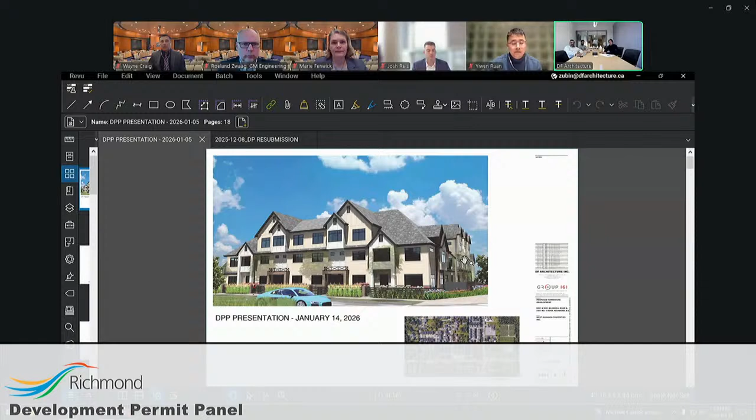So everyone can see the screen? Yes, you can go ahead and maximize. We'll go on to the context. The next sheet, please.

This is a site which is located at the intersection of Number 4 Road and Blundell Road. We have townhomes on the west and north of the property. On the east side, across the street, we have a daycare facility and a two-story single family home. Similarly, on the south side, we have two-story single family homes. The access to the property is through the existing drive aisles of the townhomes from the north, and to the west through the shared access agreement. The project consists of 14 townhome units, spread across 3 buildings, with building 1 the westernmost northwest building, building 2 facing Number 4 Road, and building 3 facing Blundell Road. We can go to the second sheet.

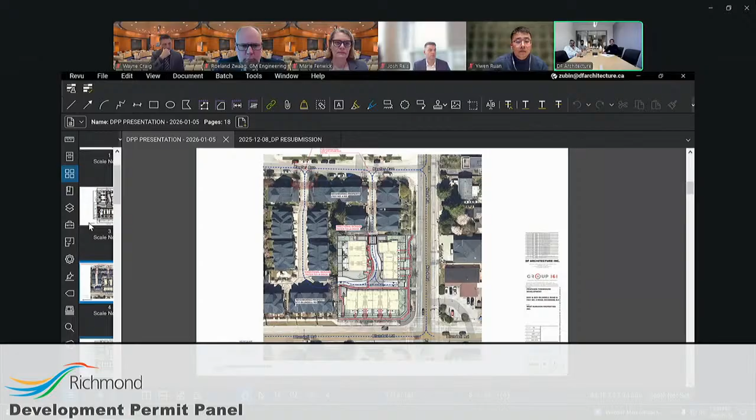In terms of pedestrian access, the main pedestrian access is through Number 4 Road with an accessible 1.5 meter pathway, which leads across the property and also to the outdoor amenity area. We also have a secondary pedestrian access from Blundell Road, which connects the pedestrian crossing to the east side as well. All the units facing Blundell Road and Number 4 Road have street level direct access with patios, thus activating the street presence and the architecture and landscape surrounding it. The convertible units, which are the larger units, are planned on the corners of the building, rather than side by side, which also adds to the elevation and massing of the overall building.

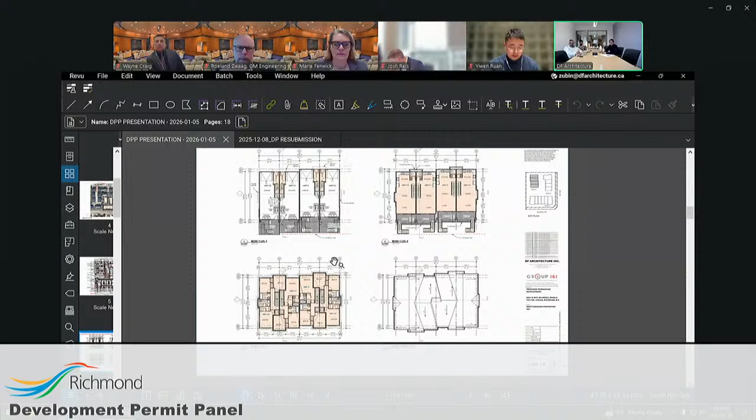The main unit typology is 3-bedroom, comprised of either 2-car garages or tandem configuration. Since building 1 faces an existing 3-story townhome development, it's mostly tandem with 3-story configuration, ranging between around 1,800 to 1,900 square feet. All units have their own private patios as required by the zoning bylaw, either covered or semi-covered.

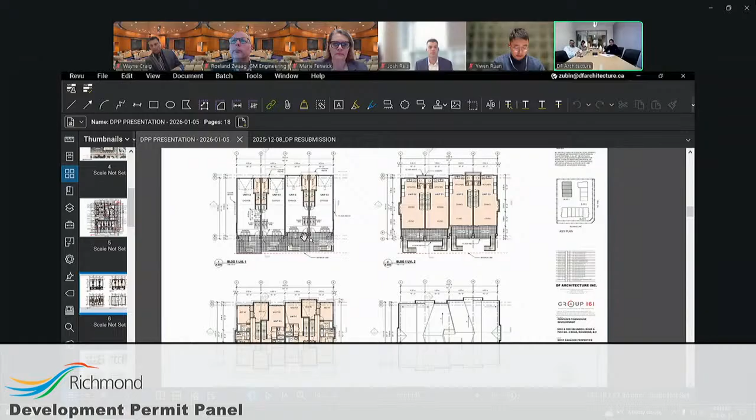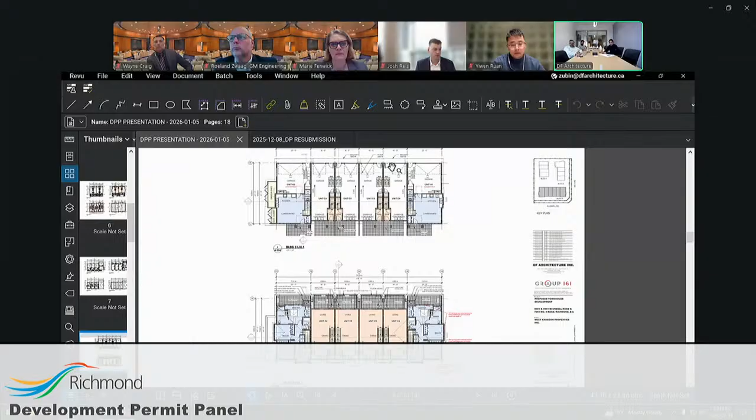Building 2, facing Number 4 Road, is a combination of double car garage units with some flex space facing the street, and one of the bigger 2-story units on the corner. Building 3 also has a tandem configuration in the middle, but the edges have the 2-story configuration and convertible units planned in there.

Go to the next. In terms of elevation and massing treatment, we've used primarily a monochrome palette with shades of beige and white, with highlights in gray, or when facing a street, brick in combination. We've also highlighted entry points using brick facade, adding richness and pedestrian scale to the buildings.

Wherever there are exposed edges to the building, we've articulated it through bay windows and by treating with different material applications, with board and batten in terms of siding.

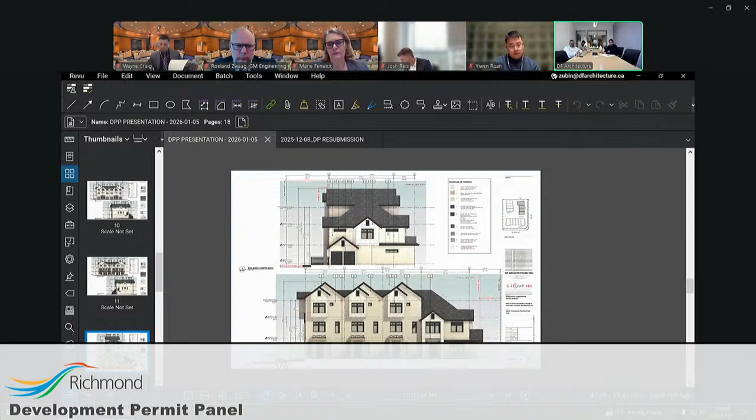All the street-facing units have direct access, and the entries are highlighted through brick. Even the ground level has a brick component added to give richness to the scale and facade of the building. Go to the next one.

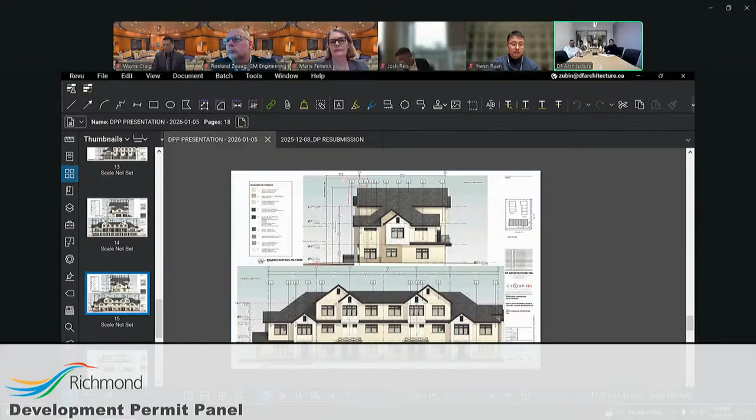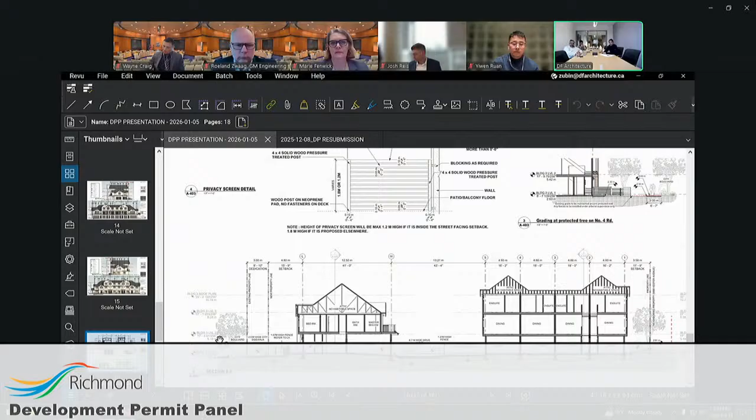This site section shows the 2-story configuration at the corner facing Blundell Road, as compared to the 3-story facing the 3-story townhomes on the other end.

In terms of massing, we've intentionally lowered the corners to give that 2-story approach so that it gels well with the landscape and surrounding context. The high pitch roof stitches the whole building together.

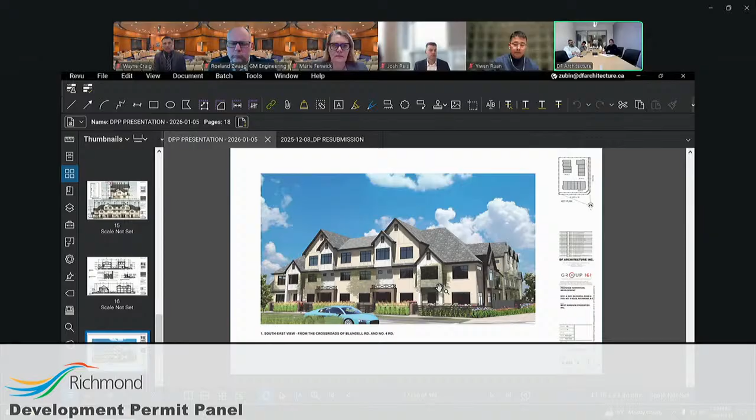In terms of material application, we've used board and batten, which is more like a modern farmhouse architecture style, and the high pitched roof having the context of some historical Tudor style. So there's a bit of balance between the modern and older style.

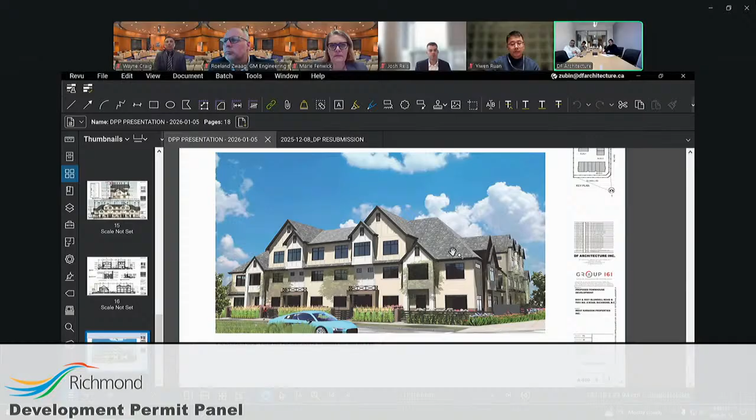In this image, the northeast and southwest, you can see the corners have been intentionally lowered so they basically stitch well with the streetscape of the project.

The material palette, again, we've used brick and fiber cement cladding and shades of white, and wherever we've highlighted the entrances and canopies, through the fascias and brickwork.

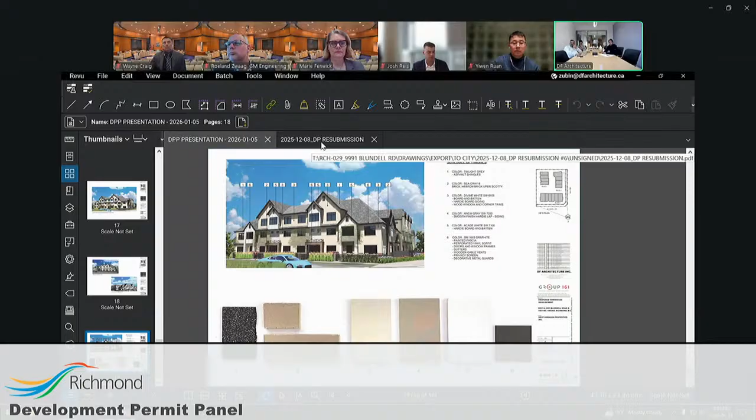With that, I'll pass it on to our landscape architect, Yiwen. Thank you.

Do we have a landscape drawing to share? Yeah, I think it's at the end of the PDF. If you go to the last sheet. Sorry about that. Thank you.

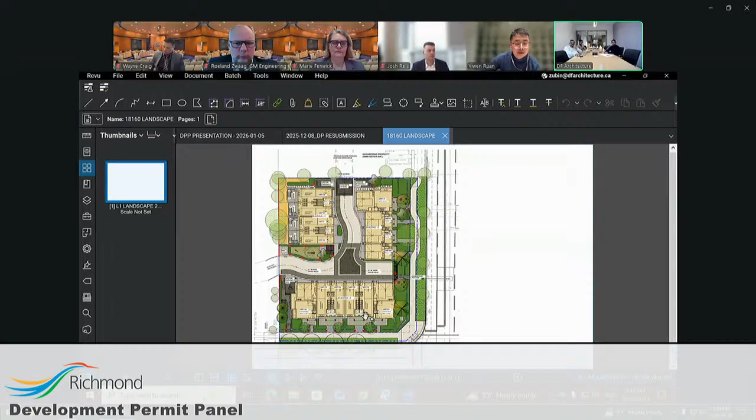In terms of this project, the landscape outdoor amenity area is centrally located and designed as a multifunctional space for the residents. The children's play area is intended for younger age groups and features play equipment that encourages social interaction, imaginative play, and balance. Adjacent seating areas are provided so parents feel comfortable looking after their kids.

The amenity space is fully accessible, while a fence and landscape buffer are proposed around the perimeter. Along the road frontage, layered planting is proposed together with a 42-inch high aluminum fence and address columns to enhance the streetscape and provide a clear and welcoming identity for the site.

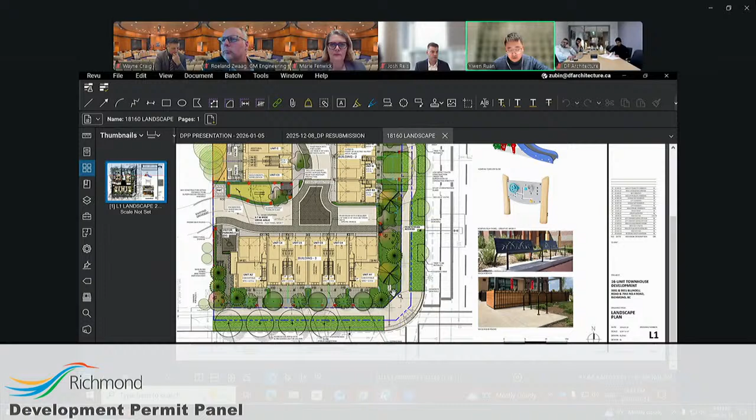Along Number 4 Road, an ALR buffer is provided in the form of a multi-layer vegetation planting area. This buffer tries to mitigate potential impacts such as noise, dust, and light from the adjacent agricultural use. A mix of deciduous and conifer trees together with multiple shrubs, providing year-round screening, and native plants has been integrated into this buffer.

To protect the privacy of the neighbor residents' property, a 1.8 meter high wood fence is provided along the property line, supplemented with trees and planting.

Site lighting is proposed along the public pathway within the outdoor amenity area and at unit entrances to enhance visibility during nighttime. Permeable pavers are proposed at the visitor parking stalls, while decorated paving is introduced at the site entrance and key intersections to reinforce wayfinding and enhance visual interest of the site.

Overall, this project provides 26 trees and hundreds of drought-tolerant plants. Also, the landscape will be fully irrigated to ensure long-term plant health. That's all for our landscape. Thank you, let us know if you have any questions.

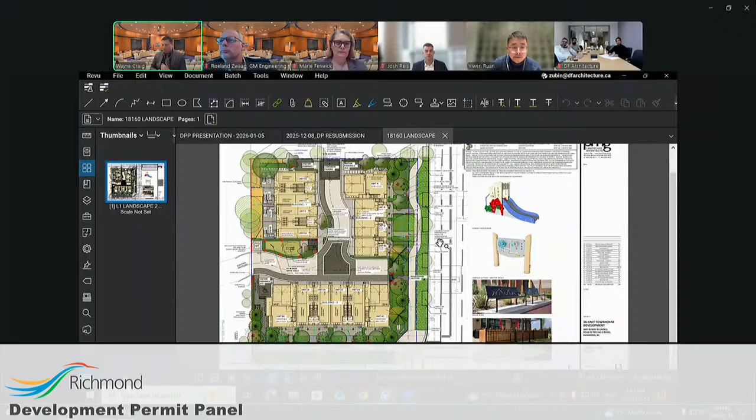Josh, any staff comments? Yes, Mr. Chair, a couple of comments. The proposed development does include 2 convertible units, located in the 2-story units that flank either end of Building 3 on the south end of the site.

These units have been designed with the potential to be easily renovated to accommodate a future resident in a wheelchair through use of a stair lift. All 16 of the units include aging in place features.

As noted by the applicant, the proposed vehicle access does include access through the existing townhouses to both the north and the west. The proposed drive aisle ultimately completes the horseshoe drive aisle pattern established in the area. An agreement has been reached amongst the developer and the stratas, the adjacent townhouse stratas, regarding cost sharing for maintenance and reciprocal access throughout the three complexes.

The project has been designed to achieve Step Code Level 3 of the BC Energy Step Code and Emission Level 1. A servicing agreement is required as a condition of the associated rezoning and includes frontage beautification along both the Blundell and Number 4 Road frontages, as well as removal of an existing sanitary sewer along the Blundell Road frontage and new service connections. Just jumping back one second there, where I mentioned an agreement's been reached amongst all stratas.